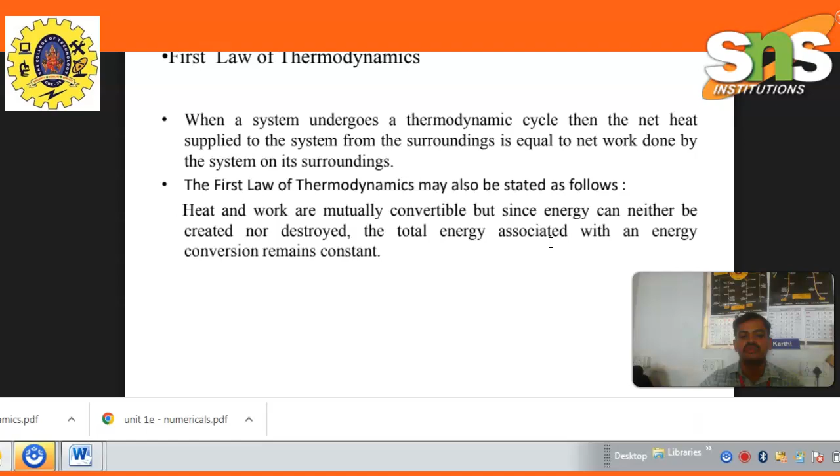The first law of thermodynamics: when a system undergoes a thermodynamic cycle, the net heat supplied to the system from the surrounding is equal to the net work done by the system on its surrounding. It may also be stated as: heat and work are mutually convertible, but since energy can neither be created nor destroyed, the total energy associated with an energy conversion remains constant.

The thermal energy reservoir, the source, is a reservoir which supplies thermal energy without undergoing temperature changes. The sink is a reservoir which absorbs thermal energy without undergoing any temperature changes.

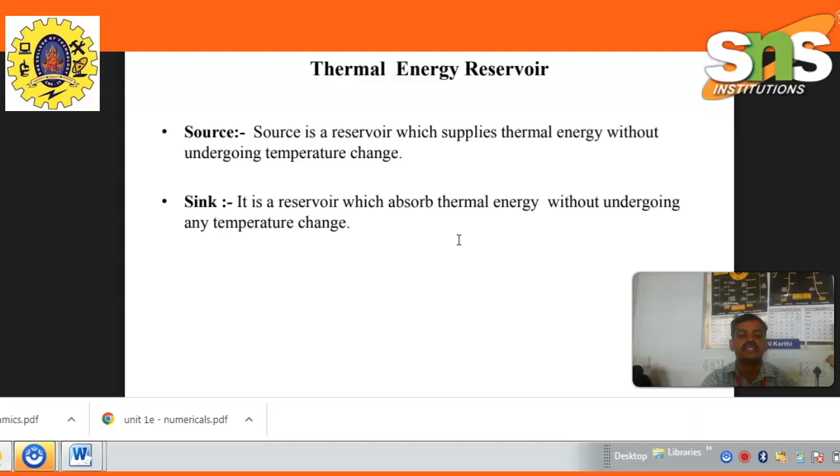The second law of thermodynamics: the Kelvin-Planck statement and the Clausius statement. The Kelvin-Planck statement: it is impossible to construct an engine which, while operating in a cycle, produces no other effect except to extract heat from a single reservoir and do an equivalent amount of work.

Clausius statement: it is impossible for a self-acting machine working in a cyclic process, unaided by an external agency, to convey heat from a body at a lower temperature to a body at a higher temperature.

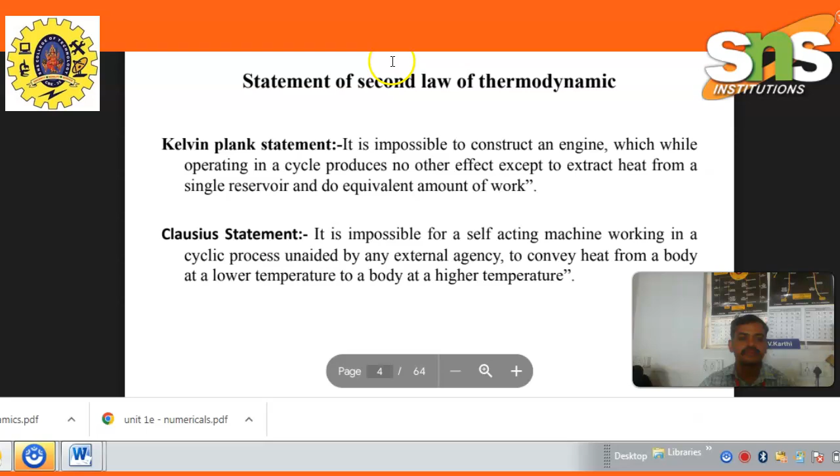Reversible process. A reversible process should fulfill the following conditions: the process should not involve friction of any kind. Heat transfer should not take place with a finite temperature difference. The energy transfer as heat and work during the forward process should be identically equal to the energy transfer as heat and work during the reversal of this process.

There should be no free or unrestricted expansion. There should be no mixing of the fluids. The process must proceed in a series of equilibrium states.

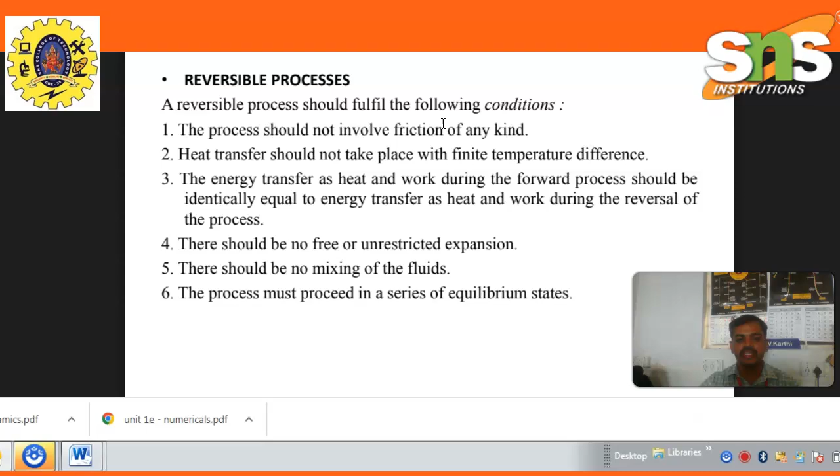Heat engines. A heat engine is a device which converts part of heat into work and rejects the remaining to the sink or surrounding. The source supplies heat Q1, heat energy W is produced, and Q2 heat is rejected to the sink. So Q1 equals W plus Q2, work done equals Q1 minus Q2, and efficiency equals output by input, that is, efficiency equals Q1 minus Q2 divided by Q1.

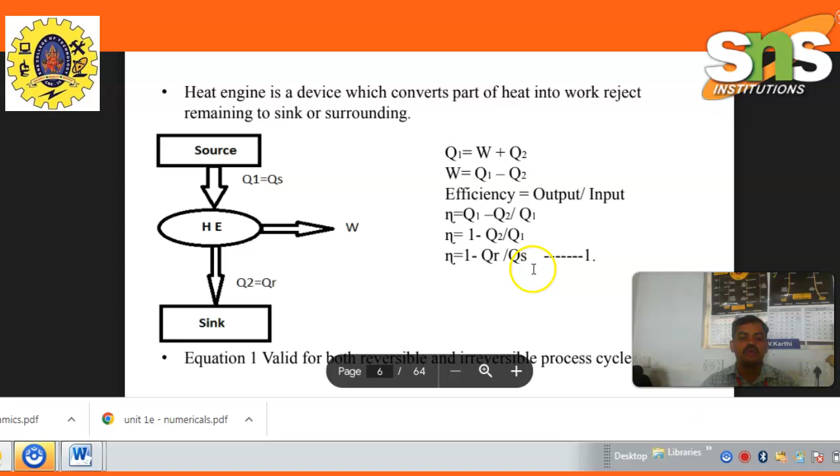This equation is valid for both reversible and irreversible process cycles.

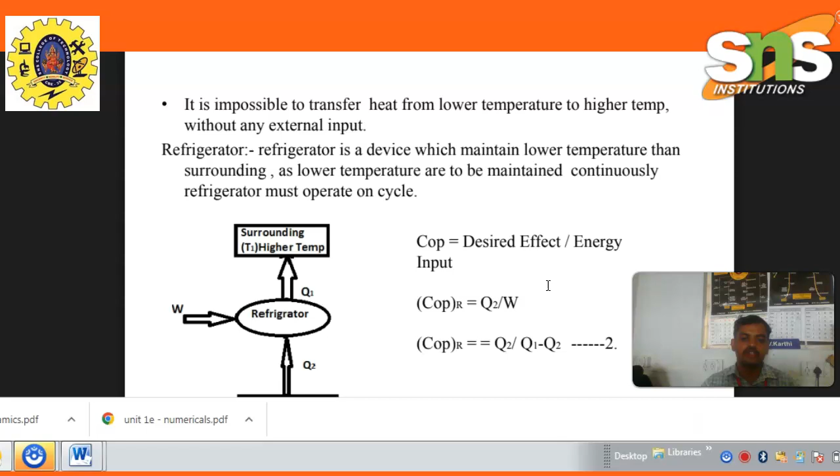The Clausius statement: it is impossible to transfer heat from a lower temperature to a higher temperature without any external input. The refrigerator is a device which maintains a lower temperature than the surrounding. As the lower temperature is to be maintained continuously, the refrigerator must operate on a cycle.

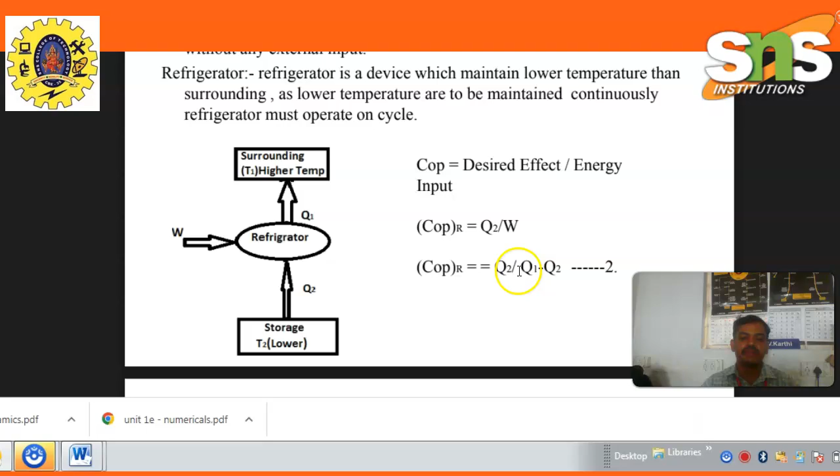COP equals desired effect divided by energy input, that is, Q2 divided by W, or Q2 divided by Q1 minus Q2. Here, the surrounding is T1, the high temperature, and T2 is the lower temperature.

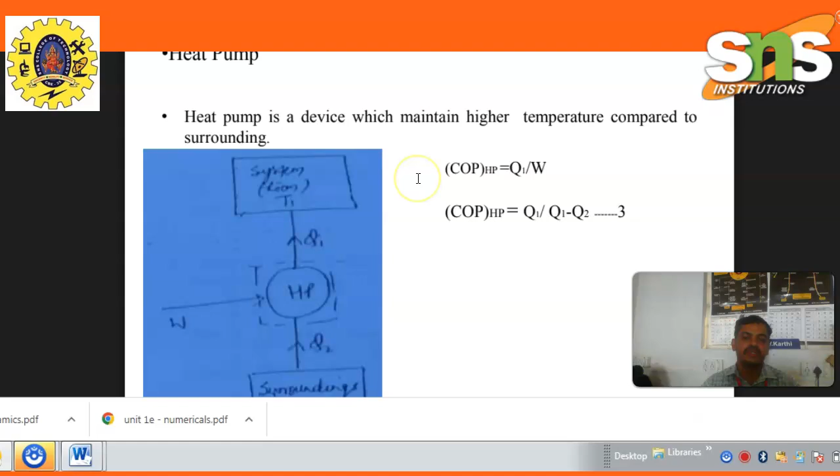Heat pump: a heat pump is a device which maintains a high temperature compared to the surrounding. COP equals Q1 divided by W, and COP equals Q1 divided by Q1 minus Q2.

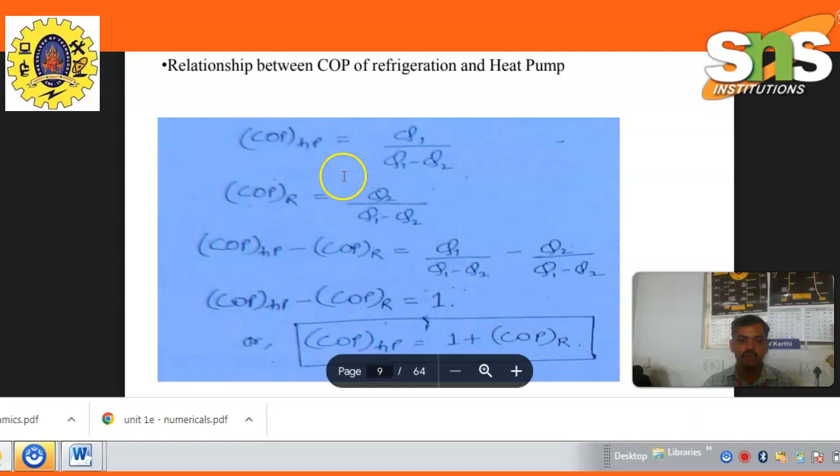Relationship between the COP of the heat pump and the COP of the refrigerator: COP of heat pump equals 1 plus COP of refrigerator.

The perpetual motion machines of the second kind: it is impossible to develop a device operating on a cycle which produces work while exchanging heat with a single reservoir. This device is known as PMM2, and its efficiency would be 100%, but 100% efficiency is impossible according to the second law of thermodynamics. Without violating the first law, a machine can be imagined which would continuously absorb heat from a single thermal reservoir and convert this heat completely into work.

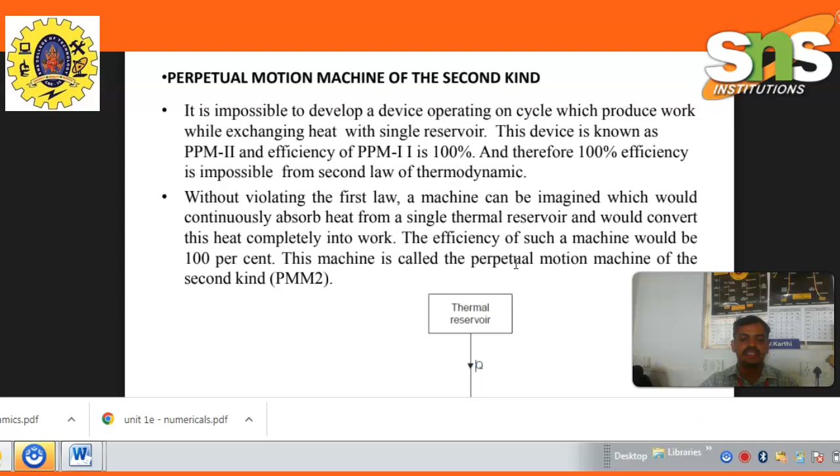The efficiency of such a machine would be 100%. This machine is called a perpetual motion machine of the second kind, PMM2, operating with a single thermal reservoir.

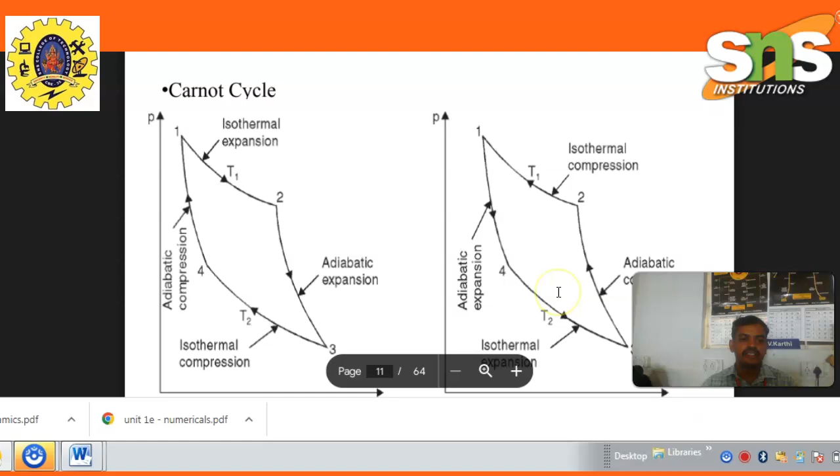This is a Carnot cycle diagram, showing the Carnot cycle engine and Carnot heat pump. Between points 1 and 2 is isothermal expansion, at constant temperature T1. Then adiabatic expansion from 2 to 3, isothermal compression from 3 to 4, and adiabatic compression from 4 to 1. So the cycle has isothermal expansion, adiabatic expansion, isothermal compression, and adiabatic compression in the Carnot engine cycle.

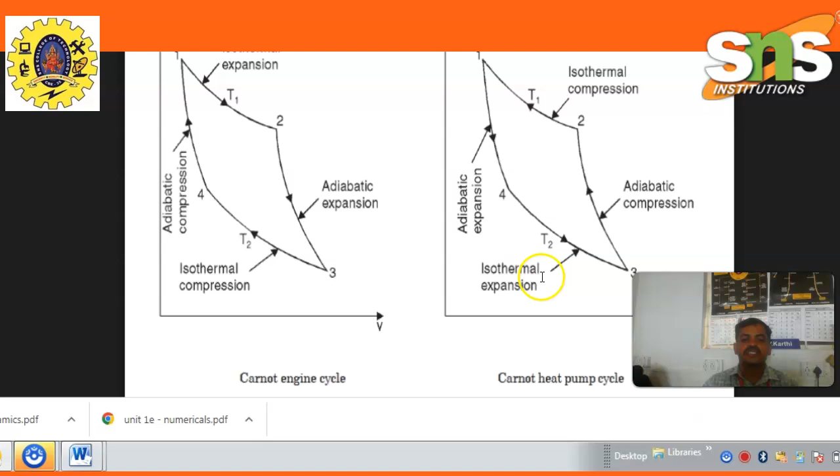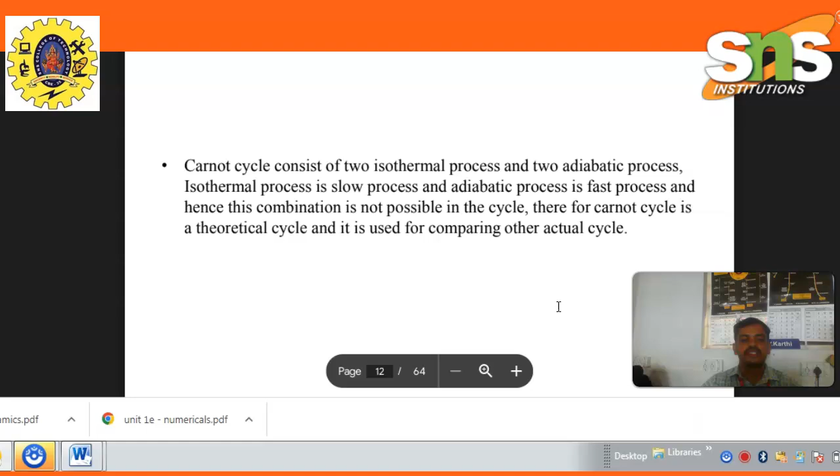The Carnot cycle consists of two isothermal processes and two adiabatic processes, plotted against volume. The isothermal process is a slow process, while the adiabatic process is a fast process, and hence this combination is not practically possible in a real cycle. Therefore, the Carnot cycle is a theoretical cycle, used for comparing other actual cycles.

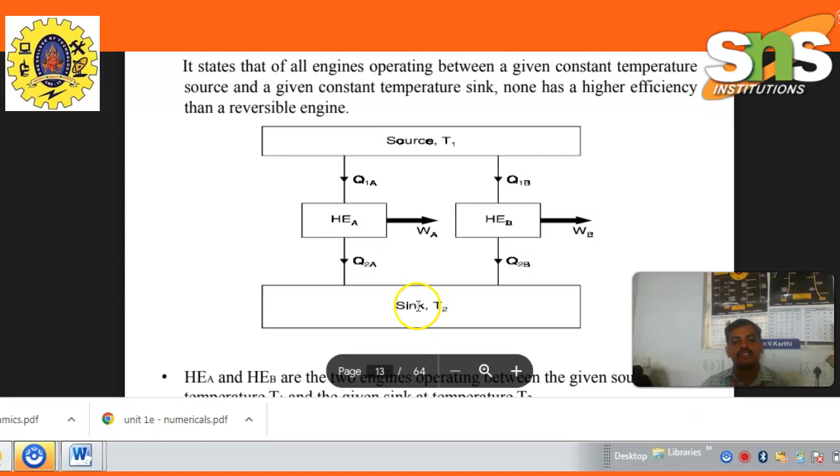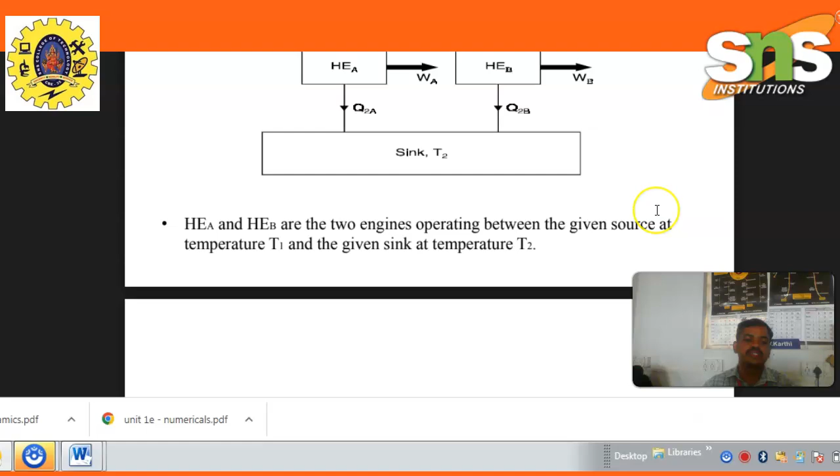Carnot's theorem states that of all engines operating between a given constant temperature source and a given constant temperature sink, none has higher efficiency than the reversible engine. With source T1 and sink T2, we have Q1, Q2 for one engine and Q1B, Q2B for another. HEA and HEB are two engines operating between the given source temperature and the given sink temperature T2.